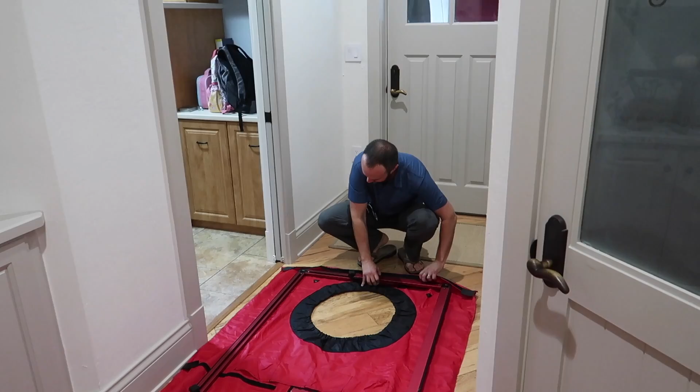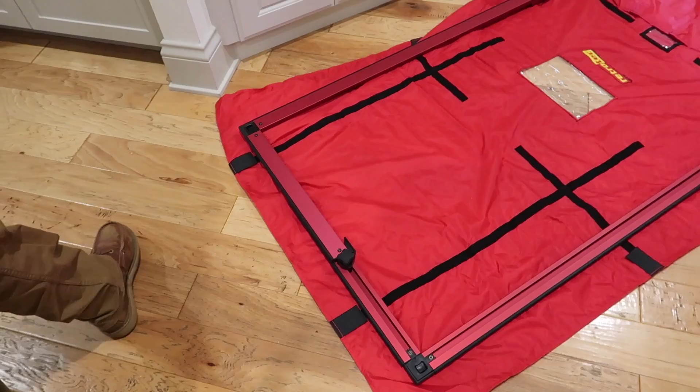All right, so you would do this blower door on the side door, not the front door? As long as you have a rectangular door, not an arched door, then it doesn't matter, as long as you're not doing it in a vestibule where you need to close things up. Honestly, there's going to be a little bit of stuff going on with this hallway, but it's not appreciable. These things are awesome, and that's anodized aluminum.

Yeah, this is not a toy. This is awesome. Also not for rent, probably, anywhere. And it shouldn't be, because you could do bad things to a house with this. Oh, really? Yeah, you could backdraft sewer gases into a house. You could set a house on fire if you had this going at the right time or the wrong time.

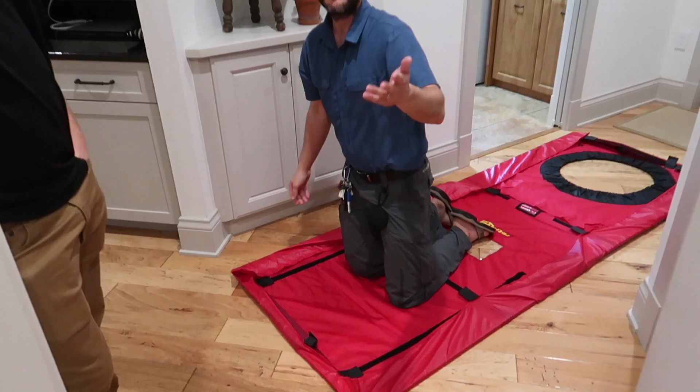So where do you buy something like this? Do you buy it direct from the company? Yeah, I get all my stuff from TruTech Tools. I don't get paid to say that, but there's kind of groups of people who deal in these tools, and so yeah, I don't just walk into a Home Depot or a store to buy this. Well, this is perfect for your research then. Yeah, pretty much anything we're dealing with, you can't walk into a store and buy it. Right, and you wouldn't want to, because the guy you're dealing with doesn't know how it works or what specific configuration you'd want. Exactly.

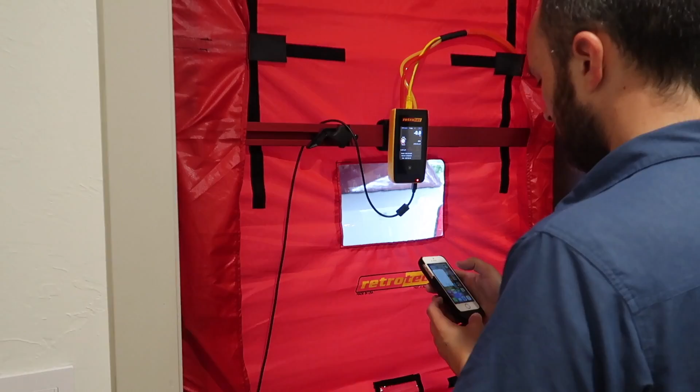This is app controlled, or can be. Yeah, all the best stuff. We live in an age where you can do this stuff. I used to be on a 2-person crew and had an assistant with me all the time, but now I can run everything myself. I could let myself into your attic, turn my fan back on, so that I can do stuff and make adjustments on the fly.

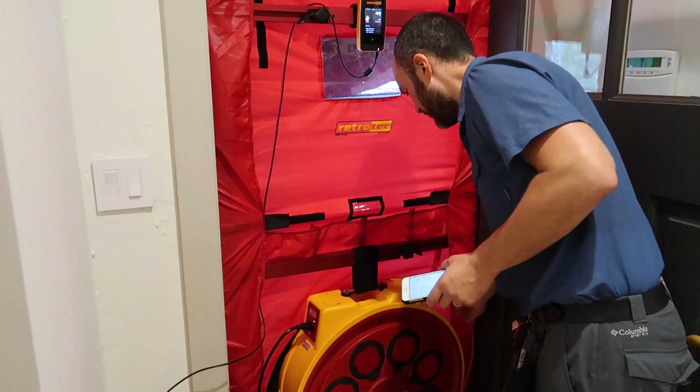That's cool. You don't really want this fan running while you step outside, because it's trying to match pressure all the time. So if you open a door, the fan tries to compensate, and when you close the door, it slams shut because it sucks. So this little fan can pressurize my entire 4,000 square foot house.

Yeah, but aren't there all kinds of leaks? Well, I guess we're going to find out. There's going to be all kinds of leaks all over the place, or is that what it's supposed to? Exactly, that's what we're going to find out. So are we going to feel it? Are we going to feel the pressure in here? No. You'll feel it if you close a door almost all the way and put your hand up — you'll feel wind coming from there, and that's an indication we have a leak in that room.

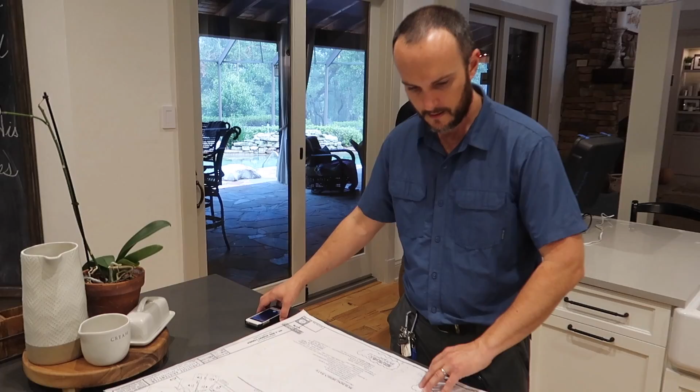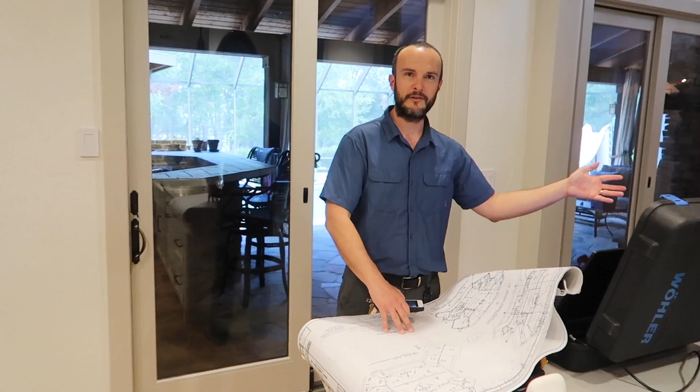Interesting. So what does looking at the plans have to do with it? Just gives you an idea where to test? No — in order to know what the test means, it's like in a car sense. I'm not much of a car guy, but I understand you have to use the right tool for the job, and the right materials for the job. Doing an emissions test on a Porsche, a VW, and a really crappy junker from India — you'd want to know what it means in context. So if I just get some numbers, they don't mean anything unless I put them in context of what the house actually is. So I'm going to build a 3D model real quick of the house and then do some quick calculations.

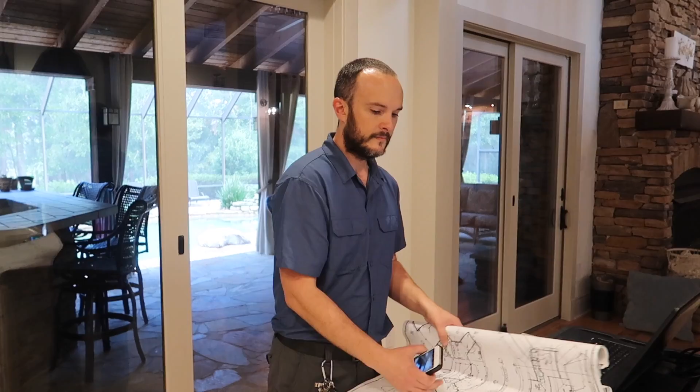Sounds to me a lot like dynoing your car. You could dyno your car at one dyno, then the next dyno — if you use two different dynos, the results aren't useful. So if I put an exhaust on the car and improve the flow, I need to go back to the same dyno with similar conditions to get reliable tests. Yes, exactly. Got it. So how do you start doing this?

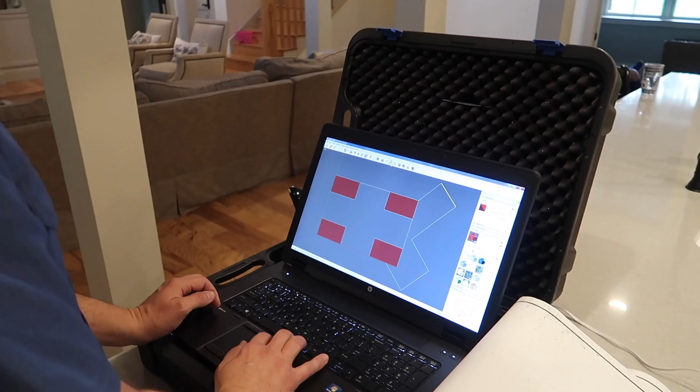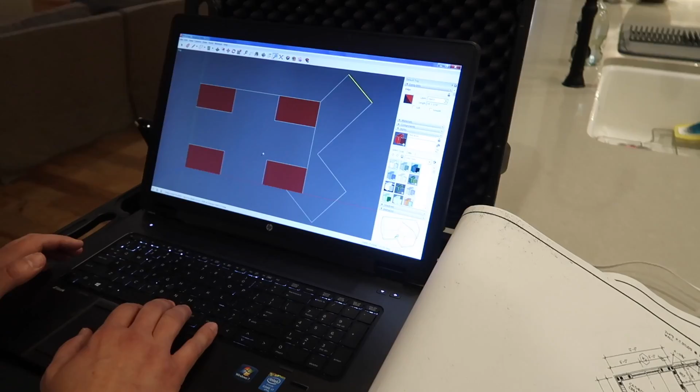You can just wake up one morning and say, I'm going to start doing home performance testing? No — I waited for the universe to tell me. I used to play piano for a living, and I made like $25,000 a year every year, which was not as fun as it sounds. My wife was an actress at the same time, and we decided to go into something else. I waited for the universe to tell me what that was, and this came up. So it was kind of fortuitous, but somebody told me this must be a thing, and I thought, oh, that sounds reasonable. Yeah, that's how I do things. Yeah, right.

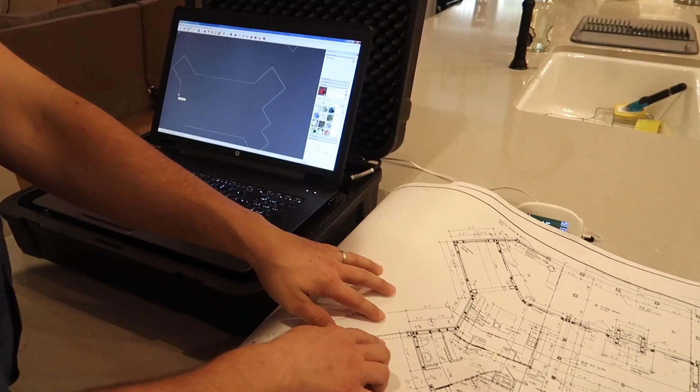Right, Bryan? Should have sent this to me beforehand. That would have been nice. Oh, that's okay.

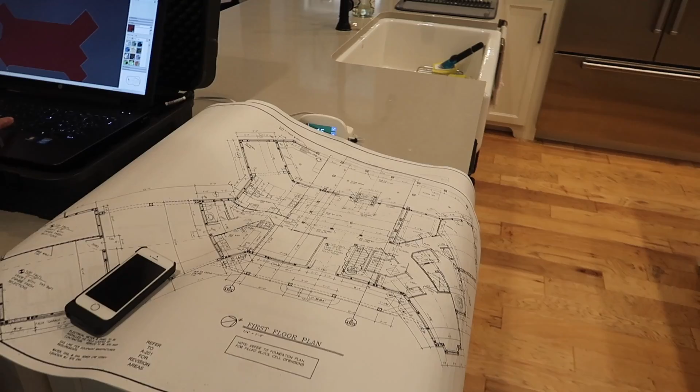Oh, this is better. I get to see how this happens. See, this is the kind of stuff I'm really bad at. You have to have a level of discipline to just sit there and look at plans and model stuff. I look at a set of plans and my mind starts to swim. See, I love plans, I actually like plans better than reality. I love the idea of plans, like seeing them in my own house. If you give me a set of plans, I can envision what it's going to be.

Numbers here, 2876. Are the doors open? What is that red thing on the door? Yeah, that's called a blower door, I think. That's exactly right.

Is that cool with you? Daddy, I need to go poo-poo. Oh, go see Mama, that's a Mama job.

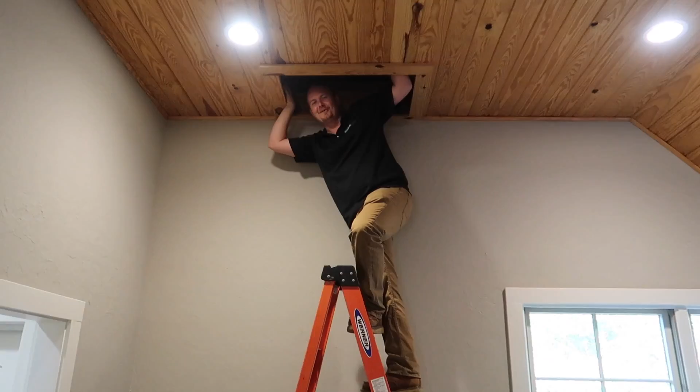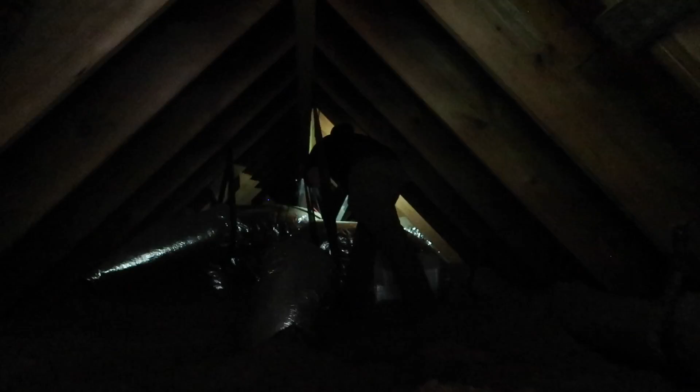No, Bryan, you are not filming this. Come on, do it. Oh no, this is just in case. Dude, no. I'm gonna look like such a fool. So I can prove it. Michelle, if this is bad, do not let him post this. Okay, I'm just gonna stand right here in case you start falling. Go, go, oh, you got it. Look at those triceps, steel, Bryan. It's for structural integrity. I've never seen a house like this ever in my life. It's my house, it's better.

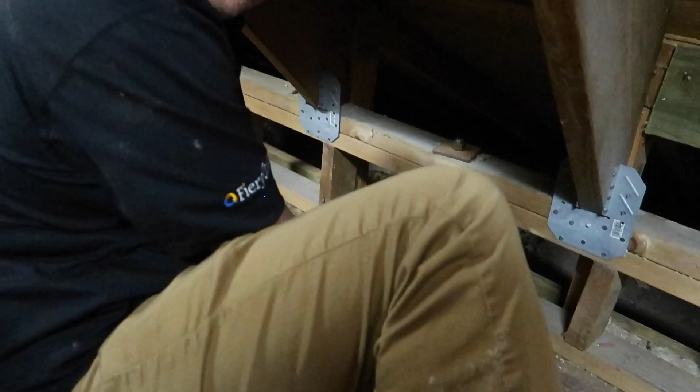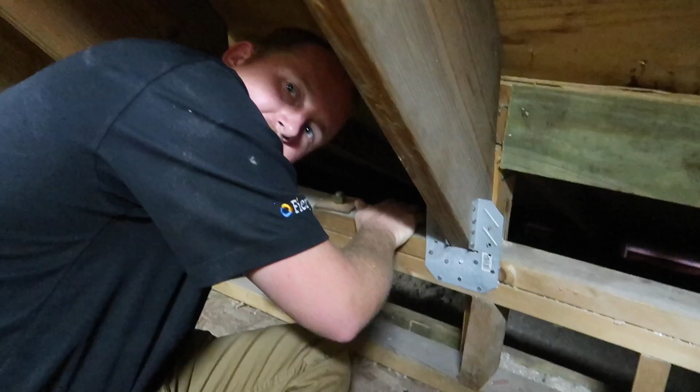But this is really where it needs to be, because this right here is all open underneath the floor system. There's nothing sealing that. Well, wouldn't it be a lot more efficient if you sealed all that off when you're building the house? Right. Yeah, but nobody does that. They're dumb, they don't think about it. It's nobody's job. The truss guy just sets the trusses and the framer just frames. Nobody thinks about it, and the drywaller comes to put drywall over everything and you're screwed. Right, and that's the building performance side of it. It's good to have somebody thinking about those details, because nowhere on the prints does it say install plywood blocking at the truss tails.

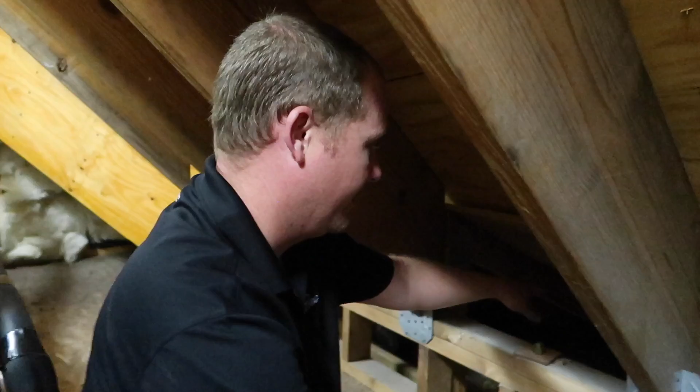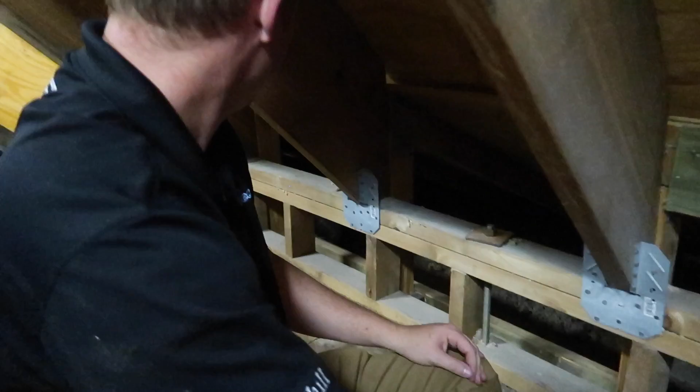So there's a couple different options of how this can be handled. It could be sealed off, you could seal everything. But you can see daylight coming in through here. All these gaps, anywhere like that, it's outdoor air coming in, which is laden with humidity in Florida. Bryan and I just did a bunch of nothing, so we checked the nothing off the list.

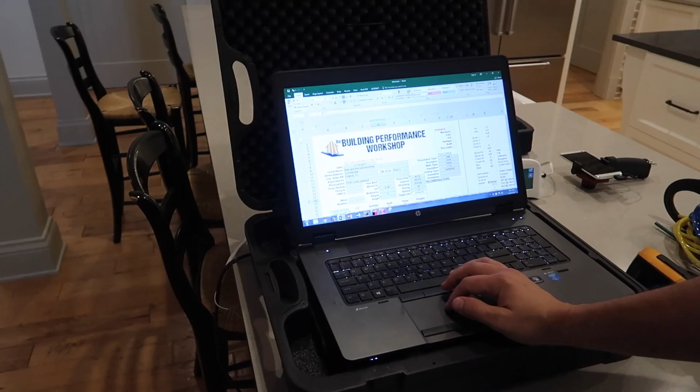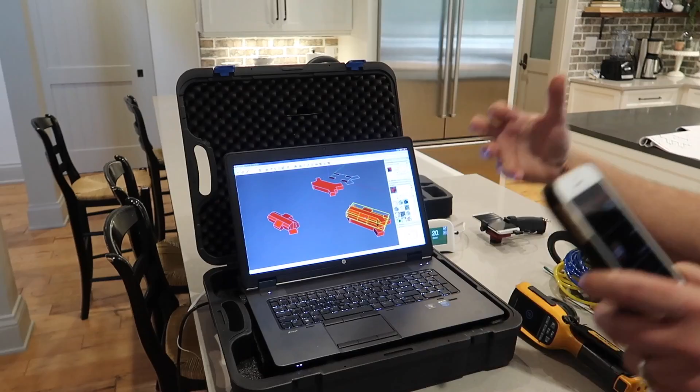So now what? Cool, so right now we've got a couple things happening. I have created, which is an important step, a 3D model of the house, not because I'm trying to duplicate what the architect did. The architect does not figure out how much volume, how much air there is inside of the house. So now I have the ability to figure out exactly how much air is contained inside the shape of your house. This is a very crude model, but it serves the purpose of being able to interpret what the tests we're going to do mean.

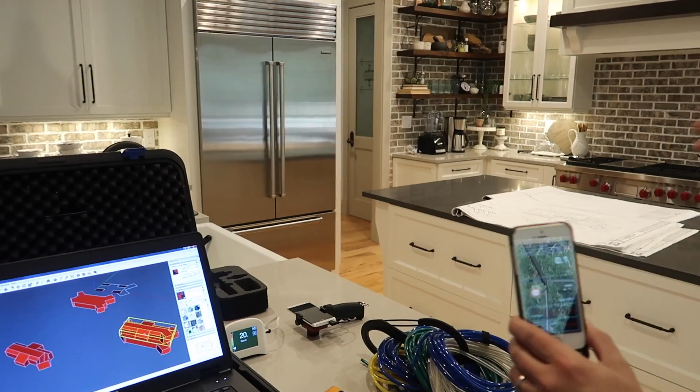And we're also monitoring the pressure inside the house with reference to outside, because we have the blower door set up first thing, and that's an important step. The first thing I'm going to do is come over here to you, Bryan. But the blower door's not on yet, right? Is it? The blower door is not on. You'll know when it's on.

We are going to figure out what this does to your house. So you can hear how massive that is, but what it's actually doing to the house is hardly anything. That's very interesting for us to know. Would your vent reduce pressure in the house? No, that's a perfect seal. So all we're doing right now is monitoring what happens in the house when we do things to it. The fact that I can kick on this gigantic commercial exhaust hood and nothing really happens to the house pressure.

In my house, for example, if I turn on my exhaust hood, it's basically a blower door test on my house until a little special vent opens up and relieves the pressure, because of the size, because of the tightness of the house. So the size of the house—what I just figured out is I turned on what is a giant fan, and either this fan doesn't pull very hard, which is probably unlikely, or the house is leaky enough that it just gets back the air immediately from outside.

So that's why we're going to do the blower door test. But once you do the blower door test, and once you potentially invest in air tightening, you want to retest what the house can do to itself, because you don't want to release a house back into the wild without a professional there to manage everything. For example, if you were making a fire and turned this on because you started burning food, you would potentially pull smoke back down the chimney because it would fight the fire hard enough. Or when the fire's not on at all, it's very easy to fight the chimney, so you'd smell like soot inside your house—that kind of thing can happen. You can also backdraft into carbon monoxide, blah blah blah.

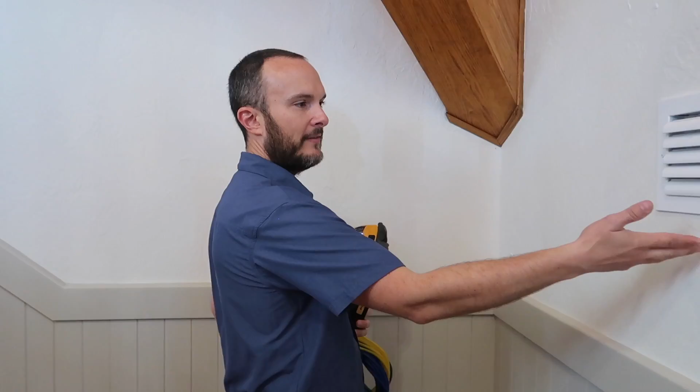Exterior walls. Having ductwork built into the exterior wall makes it tricky for the HVAC contractor that comes along. I'm sure you saw this and thought, I'd like to fix this, here's my bid, but it means tearing out your wall. And what that means is if there's a duct here, number one, there's not insulation in there, because you can't fit both things. So you've got no insulation, and you've got something transmitting a lot more temperature to the outside. There's a lot more heat bleed between the outside and this wall cavity.

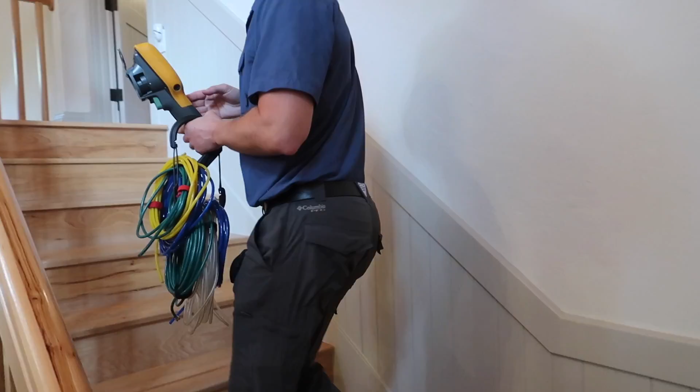So your choice there is: don't ever put ducts in that exterior wall.

Gotcha. Okay, so we're in the attic, if you can't tell.

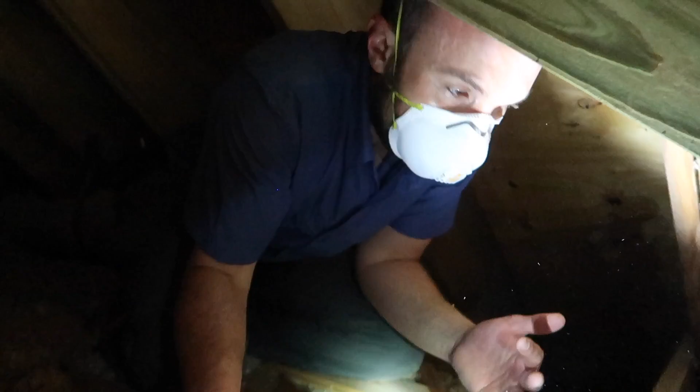The attic is important because you can verify a lot of stuff and kind of predict what you expect to see with the testing. Since the testing is the whole principle of better home performance control, you want to know what you expect to see before you run a test. Don't just run a test and get a number without knowing what it means, because worst case scenario for somebody like me, I could be about to die and I wouldn't know what the number meant if I'm testing for carbon monoxide.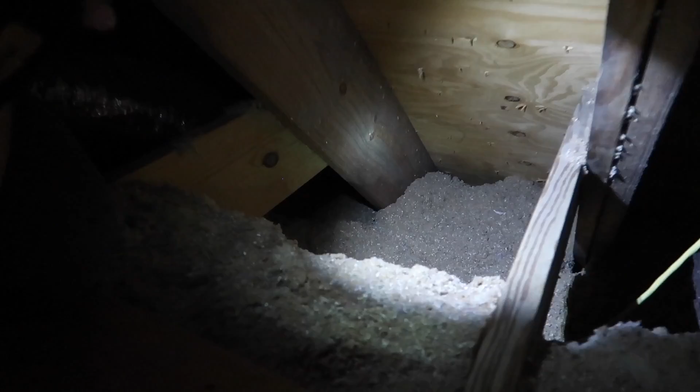So here, we expect there's a room right next to the master bedroom that has a different ceiling height than the master bedroom does, so there is your drop. That is always a dead giveaway that there's something complicated going on in the wall framing system, and unless somebody specifically came in to air seal, they wouldn't have been able to fix the air leakage problems that come from that. So probably what you have is an open cavity that I could just stick my hand down into. And yes, it does appear that that is what we'll see.

So when I do the infrared scan, I'm going to be particularly interested in that juncture right there when I'm inside the house. I only have to come up here one time just to see what I expect.

There's also this, which is a good thing. That's the exterior wall. They put in a top plate at the top of the exterior wall where it meets the attic. That is good.

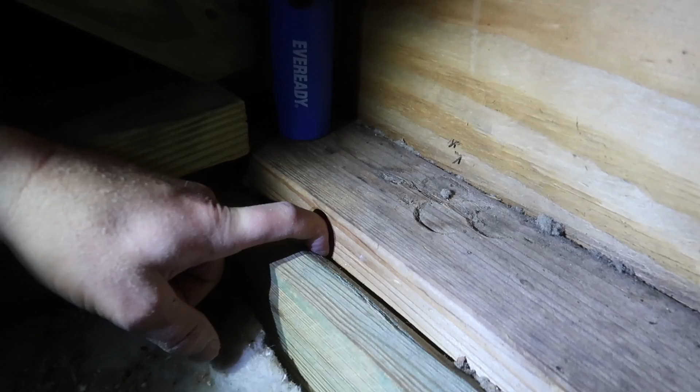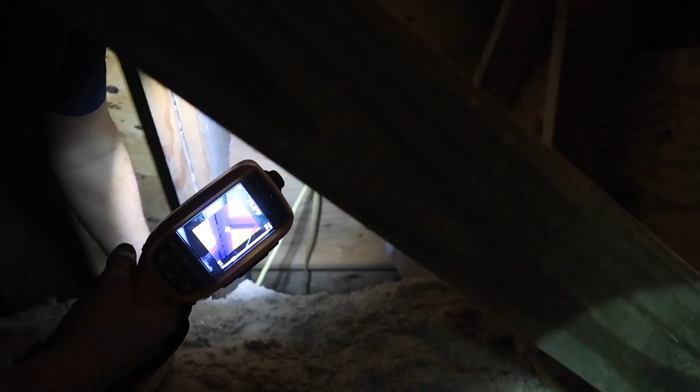This little gap though, where I can stick my finger, is enough of a gap since there's that constant pressure at work - the stack effect, cool air sinking, warm air rising. That will make a difference, and we'll probably be able to see that when we run the blower door with the infrared. So that's all we really have to do up here, just see right around the attic hatch what's going on, because if the stuff didn't get done right around the hatch where it's easiest, there's no way somebody crawled all the way over there and did good work. So if you find potential issues here, they're everywhere.

So let's go back into the comfort of conditioned space.